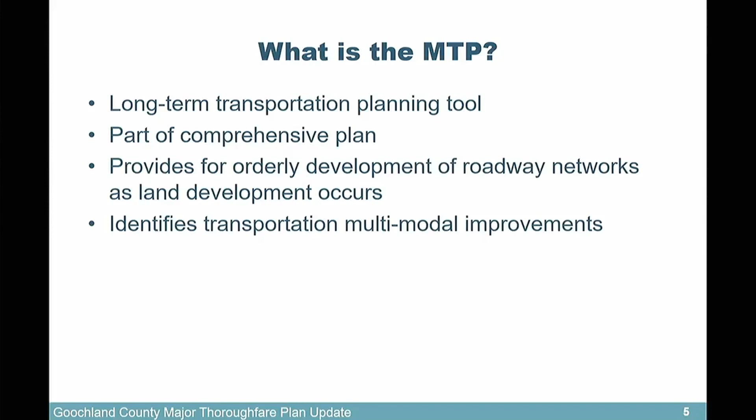So what is the MTP? It's a long-term transportation planning tool. It's very important to us because it's part of the comprehensive plan. It could be viewed as its own separate standalone plan, which it sort of is, but it really is part of the comprehensive plan. So as this plan is approved moving forward, that updates the comprehensive plan as a whole. It provides for orderly development of our roadway networks as land development occurs, which is very important to us, and identifies transportation multimodal improvements throughout the county.

Why is it important? It provides guidance to all of us, from county leaders to citizens and the development community, for transportation-related decisions. The second point is it provides guidance for preparing regional transportation plans. That's important because while we are Goochland, we are part of the Richmond region - we're part of that more global view of our road network, since 288 isn't just in Goochland, it's in other counties, and Broad Street isn't just in Goochland either. So we want to make sure we take that into consideration.

It also helps us be more competitive for transportation funding. We had 4 smart scale applications that we made just a few weeks ago that Mr. Coleman was part of and did for us. There was one project that wasn't part of the overall regional plan yet, so we had to take extra steps, which could be viewed as reactive, but it wasn't - we had a project that just became realized. Having all these projects set for us eliminates that critical step of having to have the region approve and sign off on those plans before we go for funding. So it's another important aspect of this.

Provides direction for allocating county funds for transportation improvements, which is always very important. And it is a living document that outlines all of our future needs.

So why update it? The previous plan is from 2005. We had some snickering at the first community meeting with Broad Street Road being widened from a 2-lane to a 4-lane all the way to Fluvanna. Rock Castle Road had improvements, Shannon Hill had improvements, Hadensville Fife had improvements. There were a lot of roads listed, and I'll get into more detail. Our gut reaction was, does Broad Street need to be widened all the way to Fluvanna? Gut reaction is no, but our engineers proved to us with data-driven information that that's actually not the case anymore.

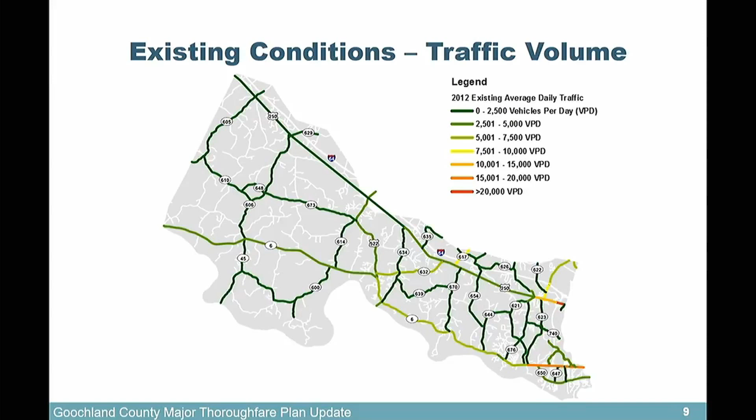Having said that, let's go into the existing traffic conditions—basically where our county sits today with regard to traffic volumes, roads, and level of service. Looking at traffic volumes today, it's not much of a shock, but we do know we have issues on certain roads. There's a lot of green, which is really good, showing our existing average daily traffic is actually pretty good. There are some yellow, orange, and red lines, and as a result we knew we had some areas to focus on.

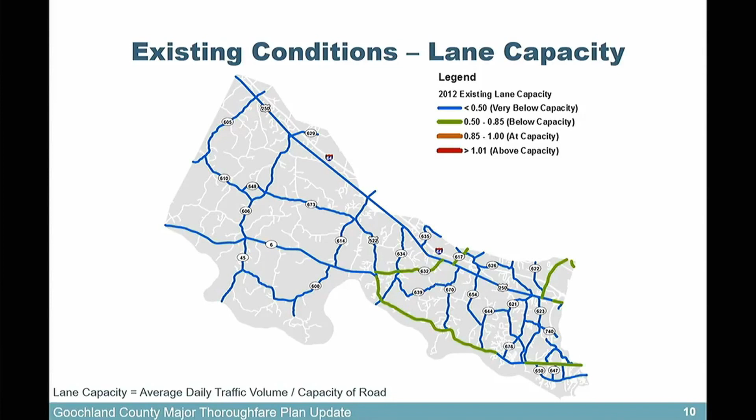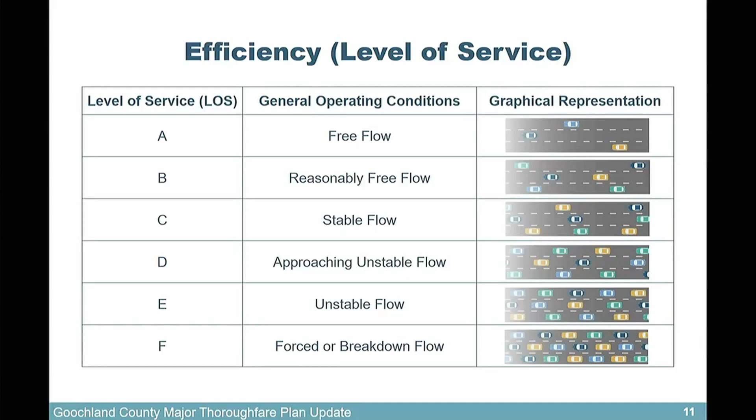The next slide is going to show the same map but with the level of service attached, but I wanted to discuss briefly what level of service actually means. We discussed this at the first two community meetings, but it's worth bringing up since it's an important aspect of transportation planning. It's really a grade allocation just like you'd have in school—A, B, C, D, E, F—and the images on the right show what that means. It's really a level of comfort: how comfortable are you on a road, can you change lanes easily, do you have to constantly wedge yourself between two cars, and with traffic signals, are you waiting 7 or 8 turns before you get to go through? So it's really your comfortability at these items.

We've also had several complaints on the I-64 Ashland Road interchange. Good news is we've already held a community meeting about what the public would prefer at that interchange based on VDOT's recommendations. VDOT had a few recommendations: a double roundabout, a full clover leaf, and a divergent diamond interchange, which is what you see at Zions Crossroads. Based on public feedback, we've gone with the divergent diamond interchange.

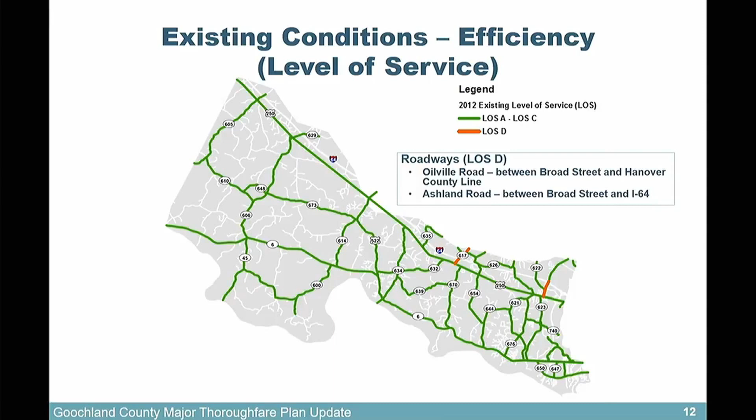So that's not in place yet. That was a smart scale application, so it's going to be a few years before that project's realized. But that's really why you're seeing that D there today.

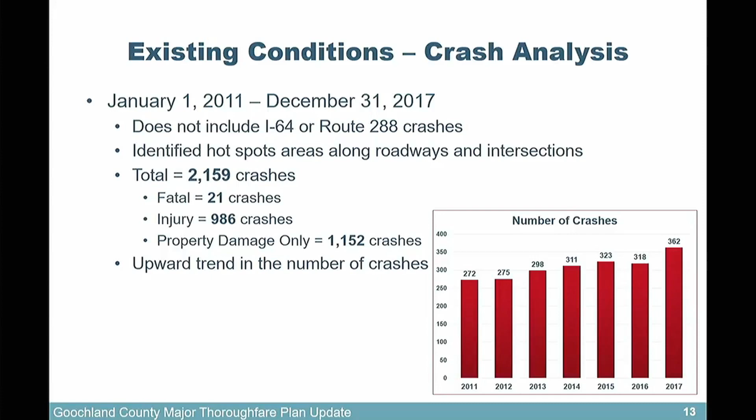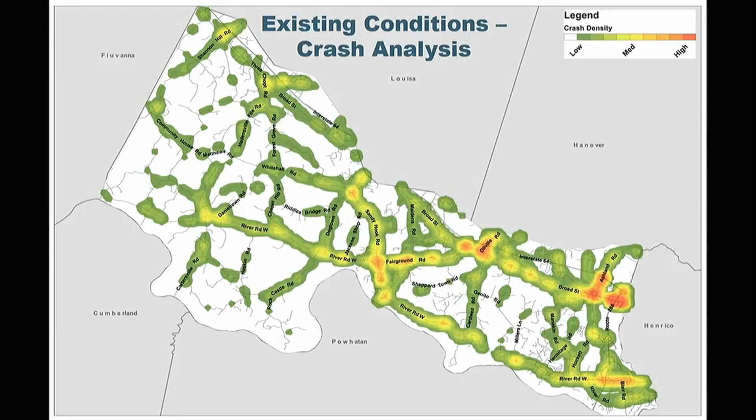We asked Kimley Horn to put together a heat map for us showing those crashes. I won't go through this in too much detail, but you can see some of the strategic areas already mentioned: Oilville, Ashland Road on Broad Street, and Route 288, where some traffic signals are already going to be installed. As a matter of fact, that interchange is going to have the traffic signals installed this fall, I believe. And down on West Creek Parkway and Patterson Avenue, those materials, from what we've heard, are already ordered. Is that right, Mr. Coleman? The materials are already ordered for that interchange. So we're excited about that—that can help us significantly.

So the next step we wanted to do, more of an exercise than anything, is what would our roads look like in the future if we didn't make any improvements? What does that mean for our roads? What does that do to the level of service? What does that do to the volume to capacity?

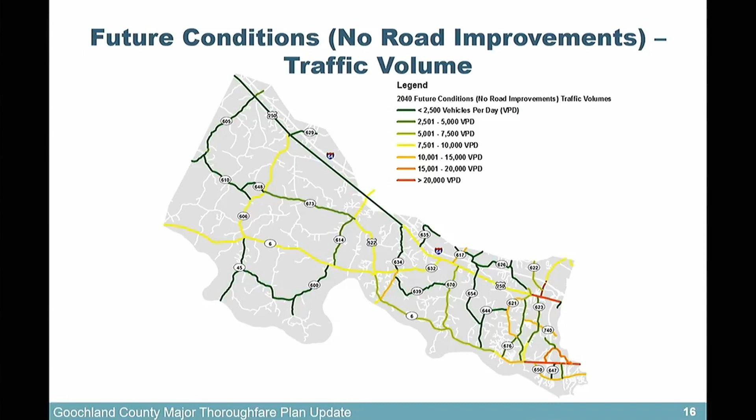Without any improvements, that original traffic volume map you saw a few minutes ago that had a lot of green lines, a lot of them have turned yellow, red, and orange. So we already knew there were some improvements needed in certain areas, but this exercise identified more areas throughout the county that would need attention if we didn't do anything.

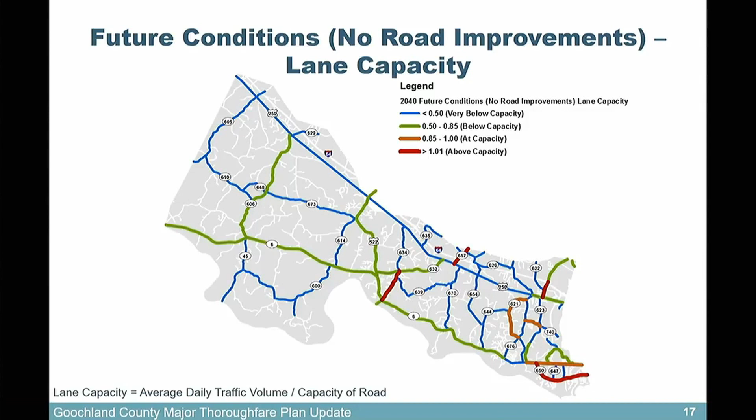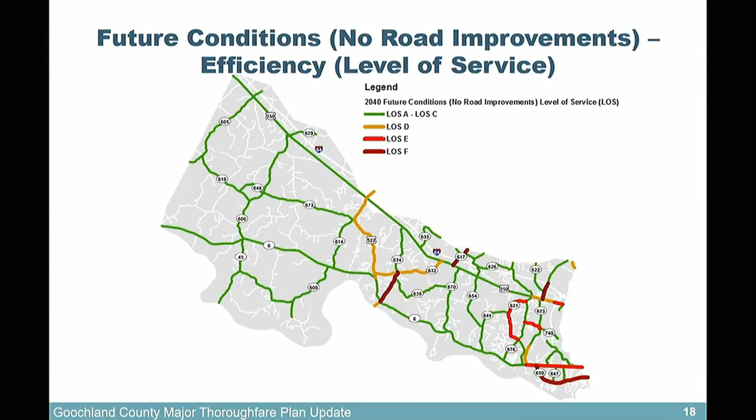So the future traffic conditions with the recommended improvements. The first few exercises with the existing conditions, and then the existing conditions with the future road traffic, were really important to get us to this very important stage—the actual recommendation section. The recommendations were based on many things, but we wanted to highlight what really guided us. One key item is our guiding principles, which will be listed on the next slide, and we also used our transportation plans.

That was in the data gathering phase of this. More importantly, the Plan 2040, which is the responsibility of the Richmond Regional Transportation Planning Organization, the RRTPO, covers the whole Richmond region. Their plan goes to 2040. In case you're wondering why our plan goes to 2040, that is the reason why.

We use existing safety and operational data. That was important for this. We also use the comprehensive plan and the analysis of future road conditions with no improvements, as mentioned. And last but not least is the public comments.

We had a lot of public comments at the first community meeting and the second community meeting. After the first community meeting, we called in some of those constituents and residents that had major concerns. We sat down with them to gather a little more detail on really what their concerns were and what they didn't like about the plan. There were probably 4 or 5 different meetings with residents, developers, and some of the developers' engineers.

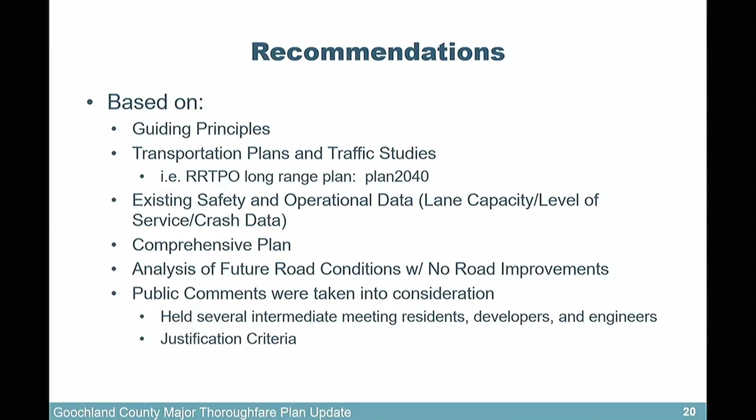We also added in the justification criteria, which was a request at one of the community meetings. So we'll show you what that is as well.

Our guiding principles, first and foremost, is always safety. It's not just with transportation, it's with construction, it's with everything we do. We want to make sure our residents are safe, so this improves travel safety for all types. We wanted to look at our designated growth areas, trying to preserve the rural character of our county. We also wanted to look at the connectivity of our roads, and it's not just roads, it's sidewalks and things like that—it's not just a road itself.

Level of service was an important factor here, and we wanted to make sure that was looked at, because we said we wanted to achieve LOS C or better. Economic development was a big driver of this. We wanted to make sure we took into consideration all the development we would see in our strategic growth areas—the courthouse, Oilville, east end of the county, and those areas. Multimodal was also an aspect of this, to provide a balanced transportation system.

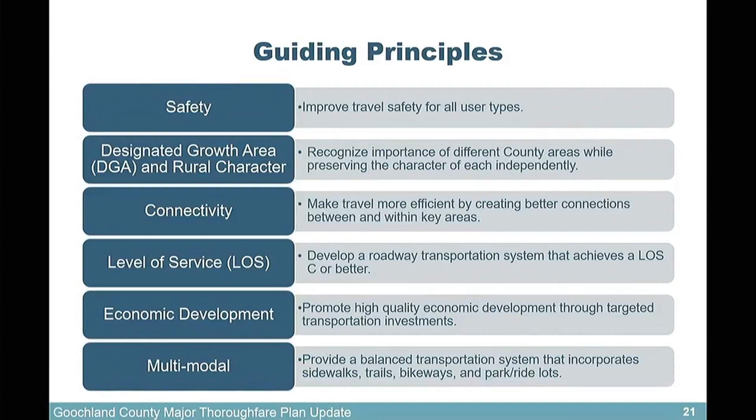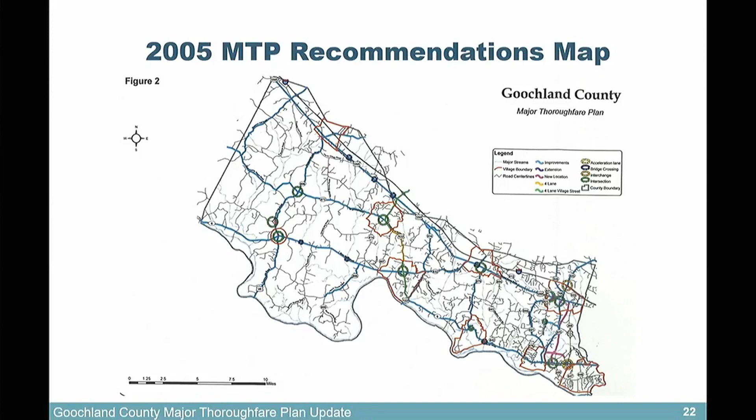This slide is actually very important, so I want to talk about it for a second. All these blue lines don't need to be done anymore, based on the data-driven information that Kimley-Horn has provided to us. In 2005, that plan showed over $100 million worth of road projects. Some of the roads didn't have costs associated with them, so I put that as a bullet point—I can only assume it's because the road project was identified so far in the future that they just didn't want to allocate a cost to it. But adding up all those projects, it's a little over $100 million.

Back in 2017, we had to take those numbers and update them for the capital impact model and the capital improvement plan. All those projects, in 2017 dollars, were a little over $200 million. So another way to look at this is that's $200 million or more that we would not be seeking funding for—that's taxpayer dollar savings just on this one slide alone. We would not be seeking local, state, or federal funds for these projects at all. And what that also does is allow us to focus a little more on the projects that are identified—take that $200 million and focus it more on the projects we know need to be done.

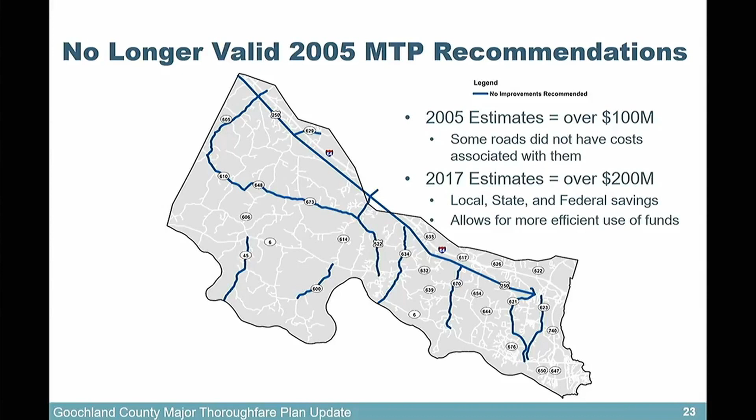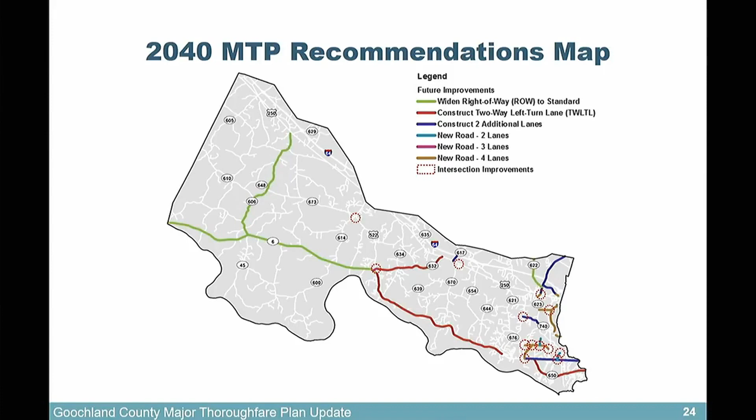Before we get into the actual recommendations, we want to show you how we're splitting it up. We split it between west, central, and east—it's easier to discuss what's in the western side of the county, the central service area, and the eastern service area.

Connectivity—we've already touched on a few points there, but again, it's part of our criteria. Multimodal, and last but not least, safety. We always want to make sure that's taken into consideration. So those are the criteria we used, and again, that comes directly from citizen feedback.

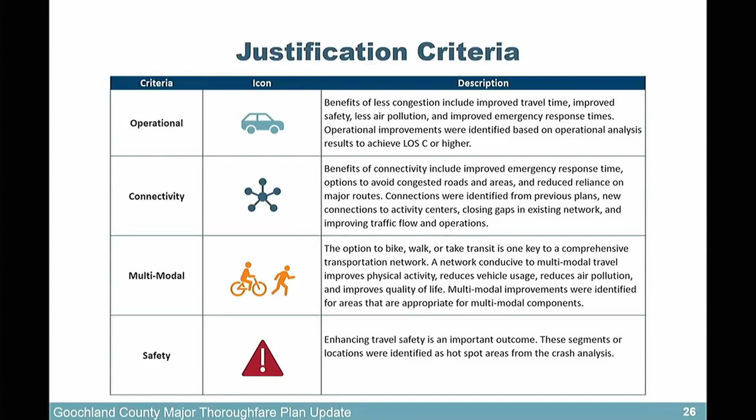And this is River Road West—I apologize, I didn't even say what it was. River Road West, from the Fluvanna County line to Sandy Hook Road. In the second community meeting, we also showed cross-sections of what that road would look like. That was one of the tasks Kimley-Horn had, so they provided us with cross-sections for all these recommendations.

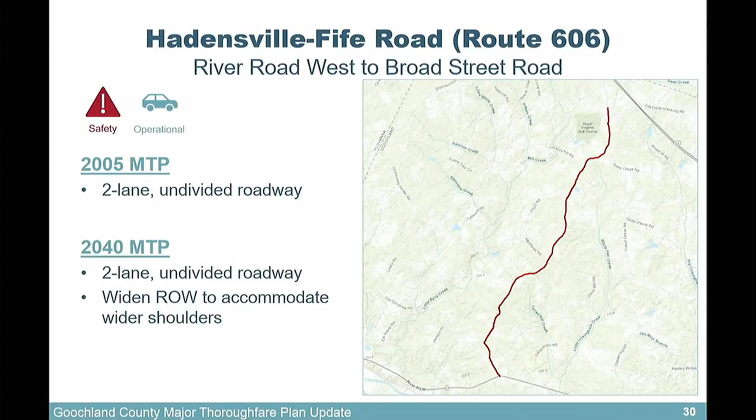Hadensville-Fife Road, same thing—widen the right-of-way to accommodate some wider shoulders. This one, as you see, is more safety and operational as opposed to connectivity. There's a cross-section, same type. So that's it for the western side of the county.

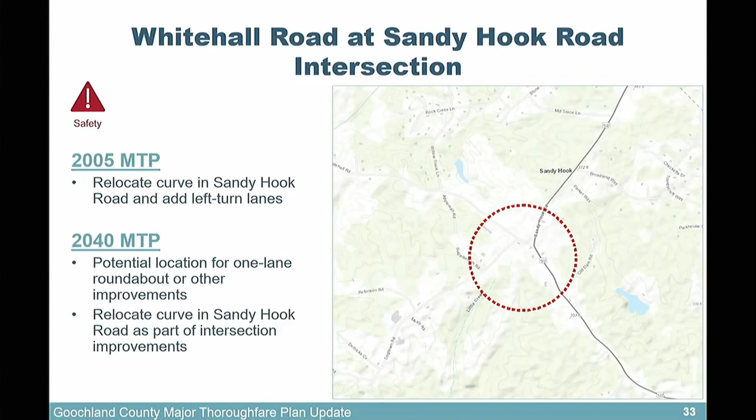Moving to the central service area, we have Whitehall Road at Sandy Hook Road intersection. Again, this isn't necessarily the road itself, it's just the intersection. The 2005 plan showed relocating the curve that's there at Sandy Hook—I've been on that curve many times, and that's what it's asking to do, relocate it. The new plan says you could still do that, but it's also a potential location for a one-lane roundabout or another improvement. It didn't say you didn't have to do what the 2005 plan said, which is relocate.

The public may not know this, but the actual intersection is already in the engineering phase—it's fully funded and being designed by VDOT as we speak. And for the extension project, we just signed the revenue share agreement recently, about a week or two ago, and that's back with VDOT, so that project is going to be moving forward as well.

Our goal is to take both of those projects, even though it's listed here as one sort of. VDOT has the intersection, but we're more involved with the extension portion—we're involved in both, but it's really VDOT's full funding for that part. We're trying to do it seamlessly, is the point. We wanted to make sure we weren't too far behind them, that they wouldn't be perceived as two separate projects. We wanted them to be seamless, so it looks like one—when the roundabout's complete, the extension's complete. So we've been working diligently with VDOT on that.

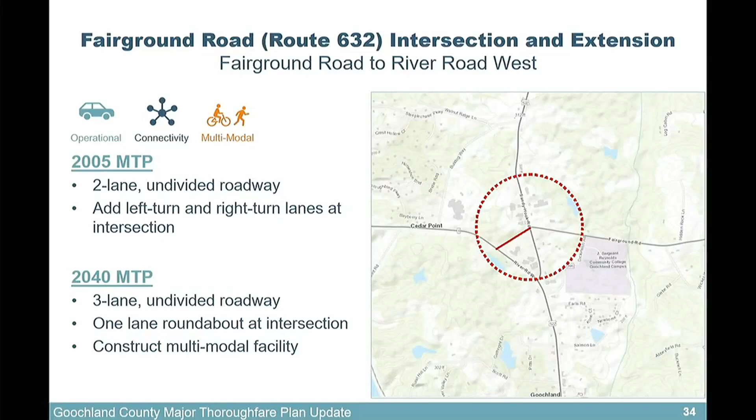We just received their 20% drawing - not the 100% drawing, just their 20%, so it's a really high level. There's a lot going on in this plan, but it does show the roundabout, the image that we just received from them. It looks to be, when you compare it to the original drawing we saw about a year ago, a higher level roundabout drawing to give us a good feel for what this would look like.

This roundabout appears to be a little bit smaller, a little less impact to the northwest quadrant, but it still does show impacts to the Exxon facility, and the extension itself to the west still shows a service road, so we're very happy about that. We wanted to have an access road behind the Exxon station, providing them another access back there. So we're actually very happy with this project right now, and we will always keep you posted on it as it moves forward.

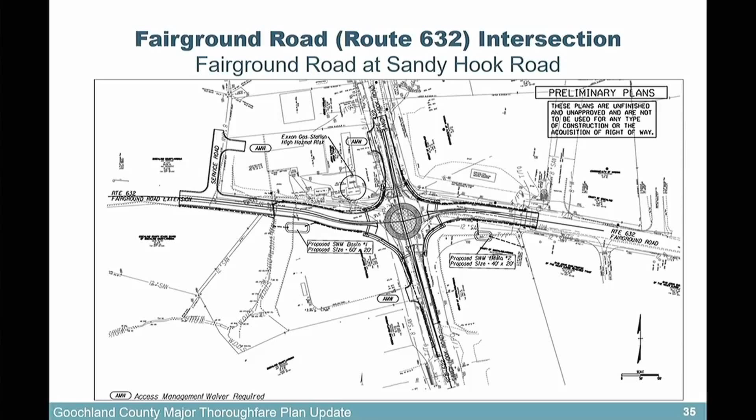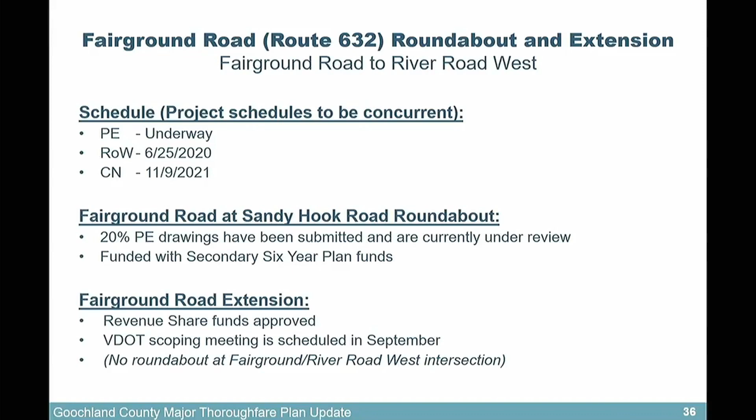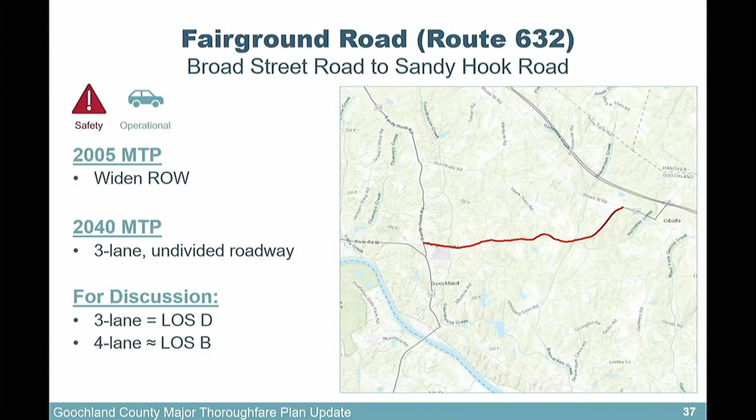And this would be a cross-section.

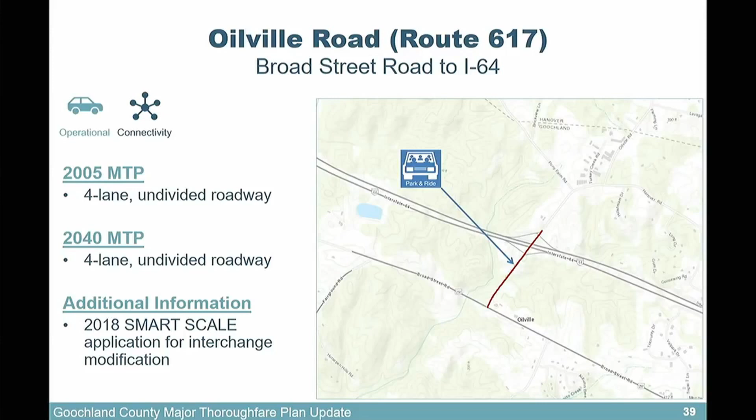Oilville Road - the 2005 plan showed it as a 4-lane undivided, and the 2040 plan still shows 4-lane undivided. You say, well, if there's no improvement being recommended here, and it's still red, what does that mean? Well, again, we're going after a smart scale application for the interchange, because it's not really the road itself, it's the interchange that's the issue. So that's already well underway, and we're very happy about that. It was a 2018 smart scale application. Hopefully 10, 11 months from now, we hear from VDOT that they are going to fund this project. We'll keep you posted as soon as we hear something from them.

This is just an intersection item here - Broad Street at Cardwell Road. The 2005 plan shows realignment of the intersection. The 2040 plan is showing either converting the intersection to a T-intersection configuration, and recommendation from Fairground to Cardwell. That recommendation actually came from the Fairground Road to Cardwell Road safety study that VDOT did for us last year. So that comes directly from VDOT.

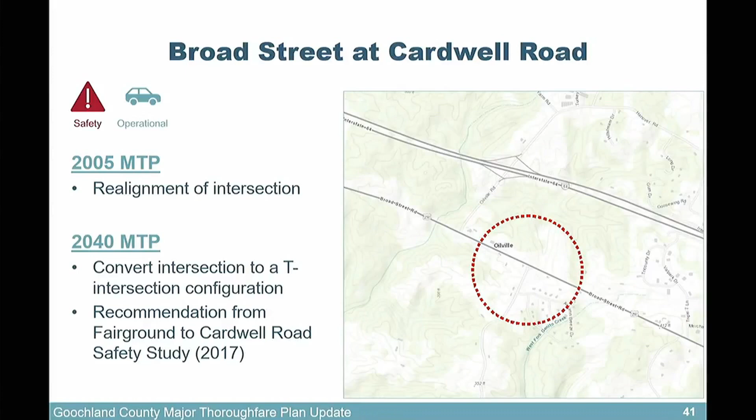So it does show the road going through the courthouse, as you can see. It's a little difficult to see, but it's on the left side of that image. In order to preserve the rural character of the courthouse, if it's 3 lanes, it would be a level of service D. Making it 4 lanes would be level of service B, which is what we're trying to get to. However, if we want to preserve the rural character of the county and keep it what it is today, we just wanted you to know the level of service would be at that level and not what the model is actually showing us.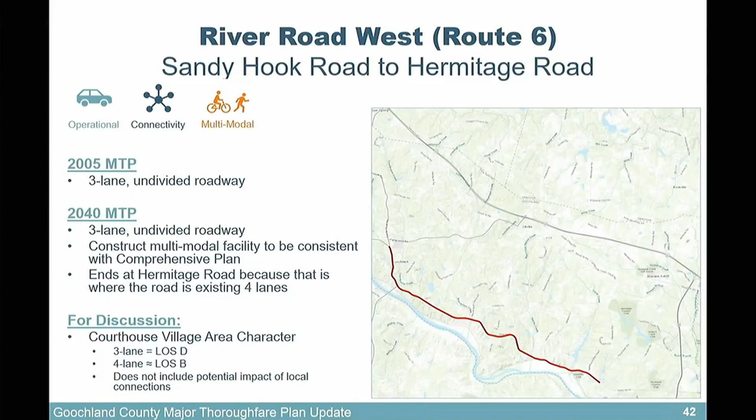That's it for the central service area. Moving on to the eastern service area. Tuckahoe Creek Parkway, at the intersection by Hermitage Road to Hockett Road, showed a 4-lane divided roadway, adding left and right turn lanes at the intersection. The updates are showing a 4-lane divided roadway as well, adding the same turn lanes, and then adding multimodal facilities. So this isn't just the road, this is the intersection as well.

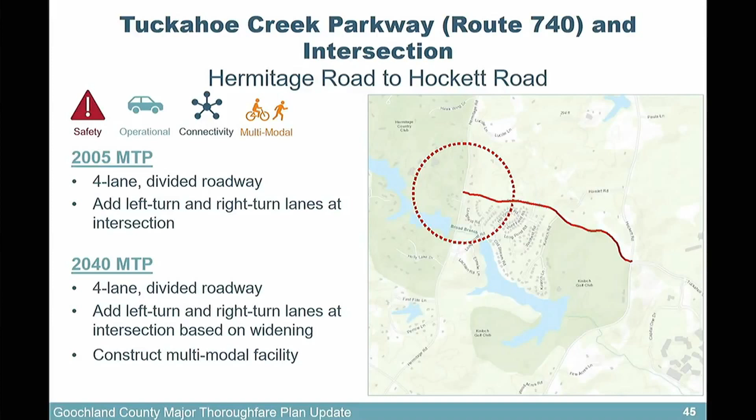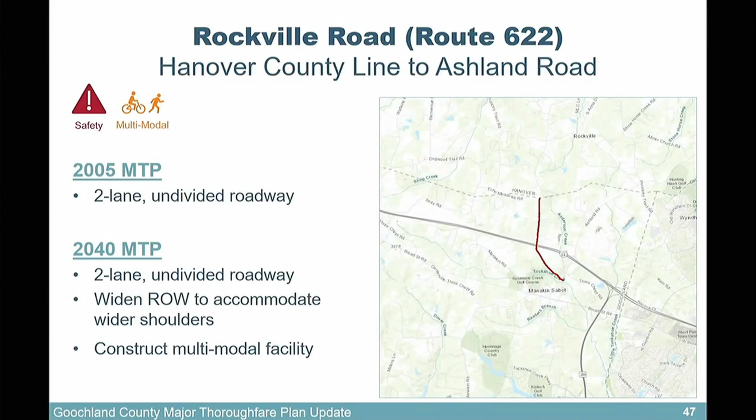Rockville Road, from the Hanover County line to Ashland Road. The 2005 plan showed a 2-lane undivided roadway. The 2040 plan is recommending a 2-lane undivided roadway as well. Again, this is just widening the right-of-way to accommodate wider shoulders and multimodal facilities. The big item here, if you notice in the icons, is the justification being the safety aspect. That was our number one concern with this road.

Ashland Road, from Broad Street to I-64. We're showing in the 2005 plan 4-lane divided, and the 2040 plan showing 4-lane divided, but constructing multimodal facilities. Again, safety was one of the number one factors on this road.

And again, as mentioned earlier, this was another smart scale application, that interchange there. VDOT just finished the Interchange Modification Report, the IMR - got to get my acronyms from VDOT correct - showing the divergent diamond interchange. So we know that this intersection will be better at some point in the future when they get that project rolling. But again, it was a 2018 smart scale application.

For discussion, the data-driven information from the software program is showing that to be a 6-lane to be a level of service B. But if that was not the desire and to keep it a 4-lane, that would be a level of service E. And it does not include potential impact on the improved interchange or local connections.

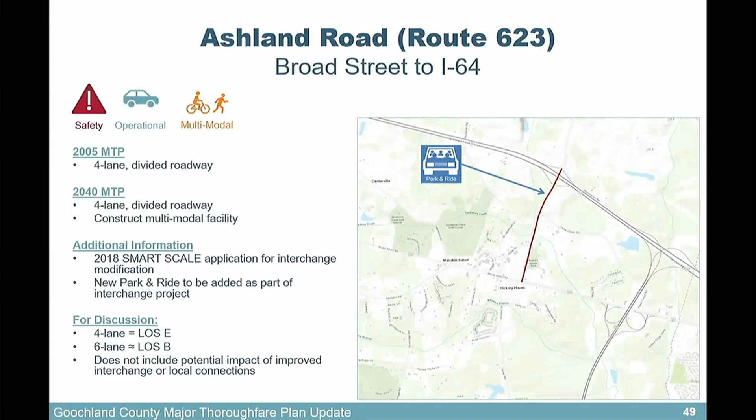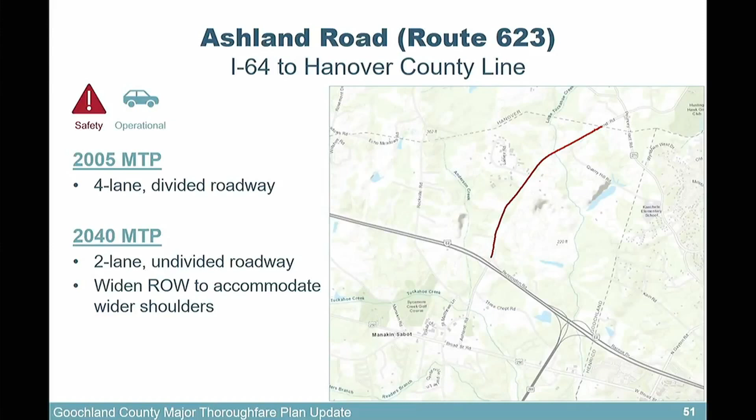So we split Ashland Road, as you'll notice, into Ashland Road south of 64 and Ashland Road north of 64. They're a little different because the south of 64 is really impacted by that interchange, while the north is, yes, but treated a little differently farther north. The 2005 plan showed it as a 4-lane divided roadway, whereas the 2040 plan is saying it can still be a 2-lane undivided roadway, but widening the right-of-way to accommodate wider shoulders. And this is what the cross-section would look like.

Hockett Road realignment project - this one's been around for a few years, it's not a new project. It was in the 2005 plan, and there were steps taken by the county a few years ago to try and move this project forward. But as we speak, the 2040 plan is showing to construct the south leg of the intersection, still telling us to do what the original plan was telling us to do with constructing multimodal facilities.

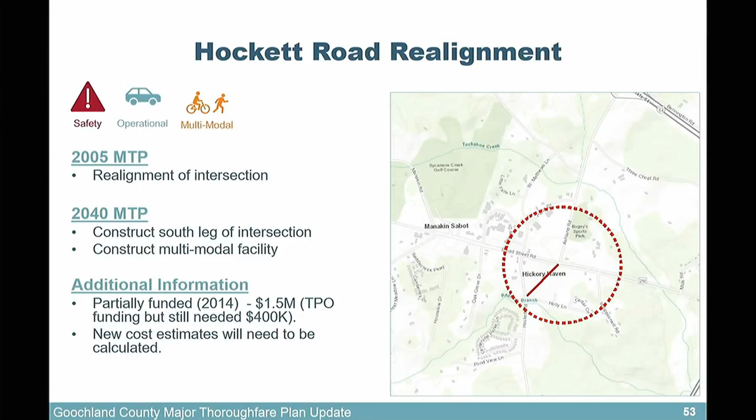Just some additional information: it is partially funded back in 2014, at $1.5 million. The TPO funding still needs $400,000 based on that 2014 number, which would bring it up to the $1.9 million needed. But again, that was 2014. It's now 2018, and we would suggest that number would be higher based on the increased construction costs we've been seeing across the board recently. So I don't want the impression that $1.9 million is all that's needed for this road at the moment. We would have to do a new cost estimate for it.

This is what the cross-section would look like.

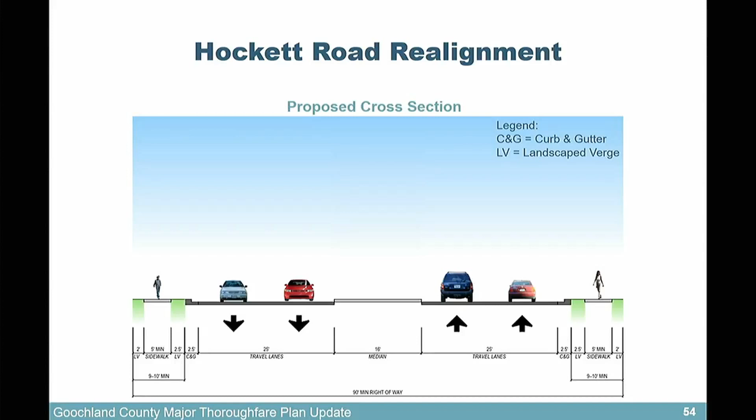Three Chopt Road - reconnecting, or really connecting Three Chopt to itself. Three Chopt Road exists on the east side of 288, and it exists on the west side of 288, but they're not connecting - it just cul-de-sacs itself. So we did a study, probably about a year and a half ago, with one of our on-call engineers to show us the feasibility of connecting those two cul-de-sacs. The gut reaction is going under 288, but is that feasible?

Is that logical? Is that something that can be done? So we hired the right engineers to look at that, and they did show us that it is feasible to go under 288. As a matter of fact, they were in charge of a project that just did the same thing in Charlottesville.

So it's not pie in the sky, it's something that's already been done and is feasible. That was also a smart scale application. Not this entire road, just a small segment going under 288, that's what we applied for funding for. We hope to come back to you in 10 months or so and say VDOT gave us approval to move forward with that project.

It was also identified in the arterial management plan, the AMP study that was done by Kimley Horn a few years ago as well.

For the road itself, the model showed us 6 lanes would be needed to keep that level of service. If it was 4 lanes, it would be a level of service D. I think the distinction here is it barely popped into the D category, and Kimley Horn could correct me if I'm wrong, but even though it is listed as a D on the 4 lane, it barely hopped into that category. This does not include potential impacts or improvements of an improved interchange or local connections, so this was just modeled for this information.

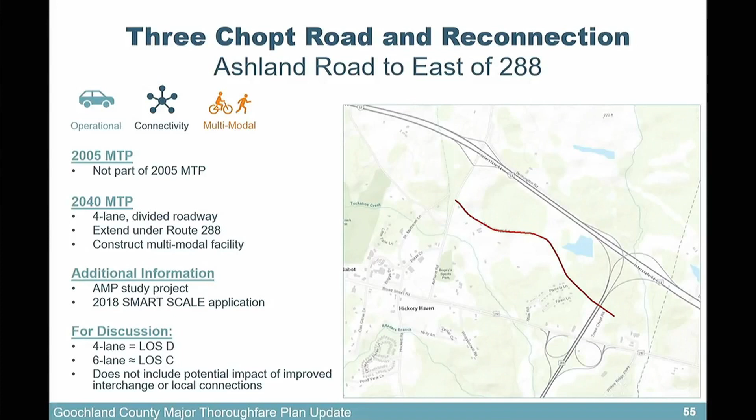Going back to the Three Chopt Road itself, going to Ashland Road, it actually wasn't part of the 2005 plan, but the AMP plan identified it. So the 2040 plan recommends a 4-lane divided road, extending it under 288 and constructing multimodal facilities with it. This is what that cross-section would look like for the 4 lanes divided.

Wilkes Ridge Parkway Extension, again not part of the 2005 plan. The 2040 plan shows it as a 4-lane divided roadway, constructing multimodal facilities on it. To date, the existing road has been privately funded, a developer-driven project. Wilkes Ridge Parkway is already there, and it ends right after the apartment complex near Sheltering Arms today, with plans moving forward to bring it closer to the creek.

And this is what a cross-section would look like.

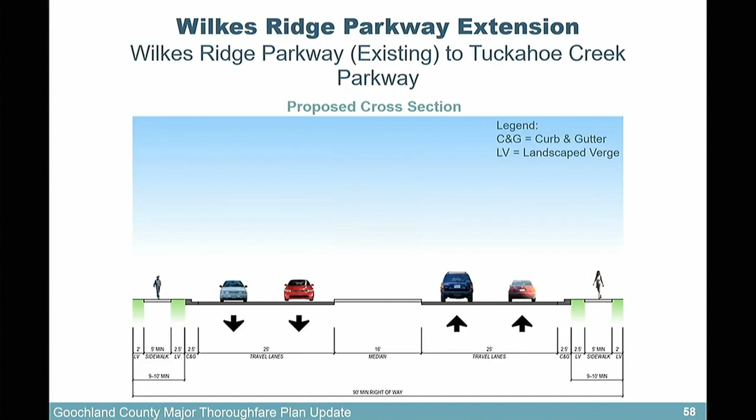So Hockett Road to the future, there's no road name here, it's just a connection from Hockett Road to that future Wilkes Ridge Parkway Road you just saw, and a new Route 288 interchange. This was not part of the 2005 plan, but the new plan shows a 4-lane divided roadway, and we would offer to conduct a study on the new interchange for 288. This would be different from the IMR. An interchange modification report modifies something that already exists. This would be an interchange justification report with VDOT, their terminology is IJR, so this would be us trying to justify that an interchange is needed.

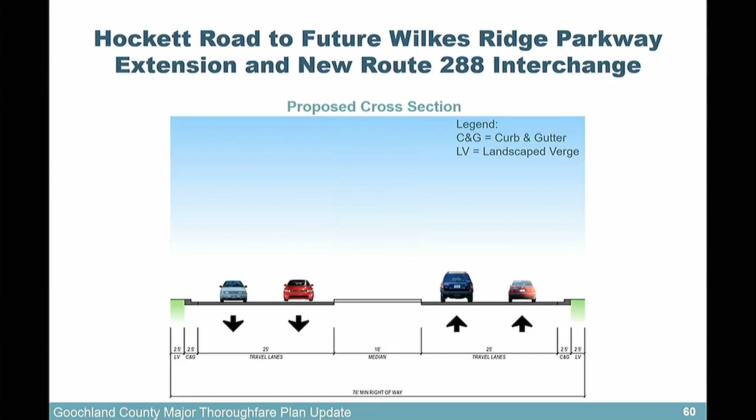And we would be pursuing TPO funding for the study, that's Transportation Planning Organization. This would be a cross-section. Again, we don't have any imagery for the interchange, this would just be the road.

Tuckahoe Creek Parkway Extension and Bridge to Henrico County, not part of the 2005 plan, but the 2040 plan shows that would be needed as a 4-lane divided roadway. There's pressures from Henrico to Route 288, we already know that, and this is a regional model, not just Goochland, so that's why you're seeing this connection to Henrico County. And this would be a cross-section.

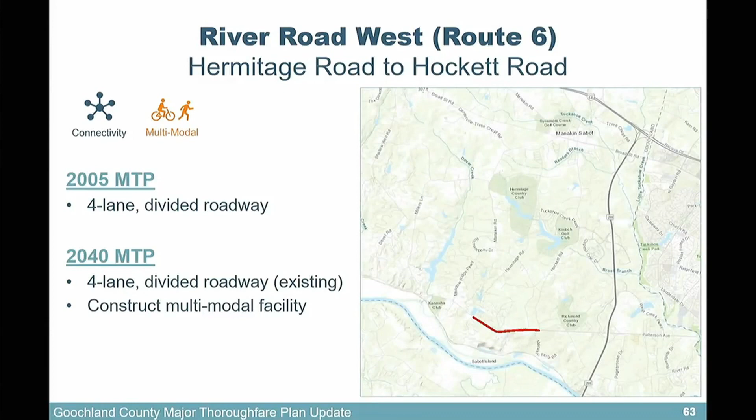River Road West from Hermitage Road to Hockett Road. The 2005 plan showed a 4-lane divided roadway. The 2040 plan also shows a 4-lane divided roadway, which actually already exists, so really the addition here is constructing multimodal facilities, as you can see with the 2 icons at the top for connectivity and the multimodal aspect. Cross-section.

Patterson Avenue from Hockett Road to the Henrico County line. The 2005 plan shows a 6-lane divided roadway, we're still showing a 6-lane divided roadway, but adding the multimodal facility to it.

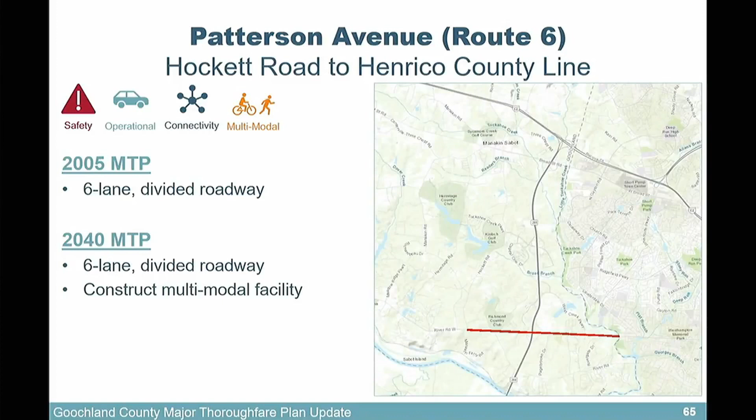And this would be a cross-section of what that would look like. River Road—I've been on this road many times. When I was with just the utilities department, we had a lot of infrastructure back in this area. And this is River Road, from River Road West, which is sort of where Patterson and River Road tie together, to the Henrico County line.

It wasn't part of the 2005 plan, but the 2040 plan is showing it, because of the growth that we're seeing, and because this road is also impacted by Henrico's growth. Henrico residents travel the road, so the recommendation is for a 3-lane undivided road with multimodal facilities added to it. For discussion purposes, this is where we're offering some discussion on this road.

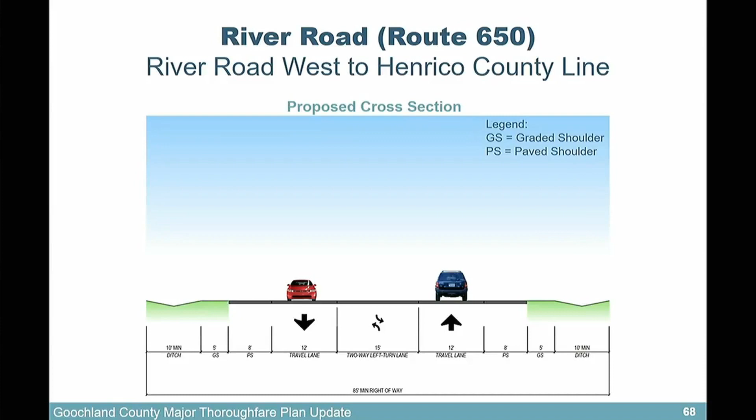West Creek Parkway from the Patterson Avenue connection, with 2 intersections here. Not part of the 2005 plan. The 2040 plan is showing a 2-lane undivided roadway. We'll identify intersection configurations as the roadway is constructed, and we do anticipate this to be privately funded.

In an area we're calling the Southern Prime Economic Development Area—this is probably the area we've had the most feedback on—from the Hockett Road corridor to the Route 288, Patterson Avenue area. The 2005 plan shows a north-south connector, 4-lane divided roadway, with an east-west connector, 4-lane divided roadway. The 2040 plan is showing, well, it's showing many things. As you can see, there are a few different roads here. But it is still showing that east-west connector is needed to alleviate the traffic burdens.

If you recall, at the first community meeting, we had a few residents concerned with the original 2005 plan, which is technically still our current plan today, showing Hockett Road widening to a 4-lane road. There were concerns with that for many reasons. One is some of the houses are pretty close to the road, so widening it would actually bring the road a lot closer to their front porch, and they were not happy with that.

So we took that information. This is where we incorporated a lot of the community feedback to keep Hockett Road a 2-lane. This is the road network that would need to be installed—the east-west connector would help with that.

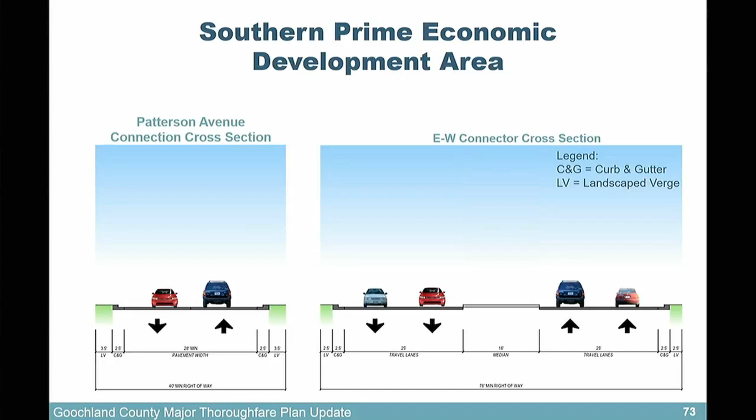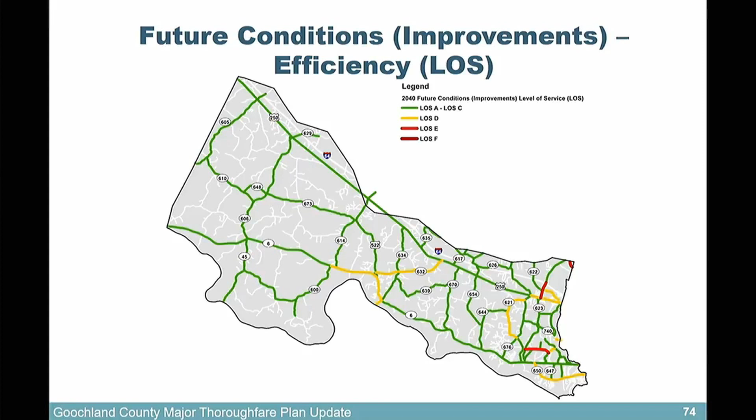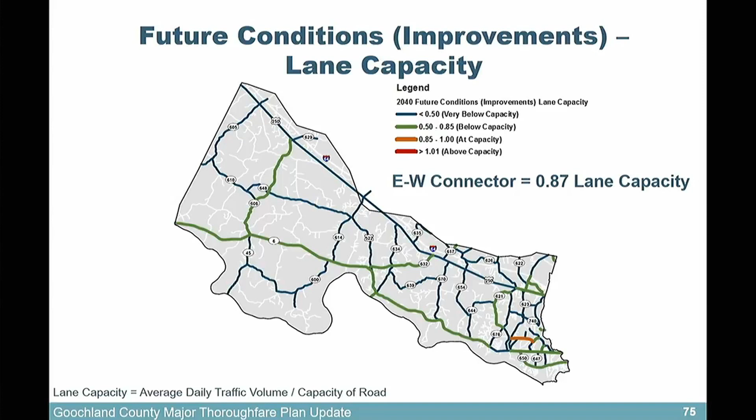So with these improvements, you'll see we're back down to the blue and the green lines. If you recall the previous slide that had the future conditions with no improvements, there was a lot more red, orange, a lot more yellow. This brings us back down to the green and the blue. I've already touched on the issues with that east-west connector road right there. But it is important to know that even though the east-west connector is listed as orange, meaning that it would be at capacity, that at capacity is actually a range - you see the range there in the legend, it shows 0.85 to 1. This is 0.87, so it barely pops into that category. And again, that's with future traffic loadings in the year 2040.

At the first community meeting, there were some questions as to what our priorities are with this plan. What are our priorities? What are we doing, or what do we plan to do with our roads? I've already touched on a lot of roads that we're already seeking funding for, but what are our projects that are underway or funded?

There's the traffic signals at Patterson Avenue and West Creek Parkway - fully funded. Route 288 and Broad Street, as mentioned, we should have those installed by this fall. Fairground Road and Sandy Hook, fully funded - it's the roundabout project. The extension project is also fully funded, that's a revenue share application with VDOT. Again, that's a 50-50: the county puts up 50% of the funds, and VDOT supplements with the other 50%.

Patterson Avenue and River Road West, northbound turn lane - engineering's fully funded for that. Wilkes Ridge Parkway extension, that would be the new road segment with private funds. Four Rings Drive, it is also a new road segment, privately funded. And then the Hockett Road realignment, it's at the bottom, it's partially funded. But the bold text shows what projects are already underway.

Our midterm priorities: the I-64 Ashland Road interchange - these are all the smart scale applications that I've already mentioned. But we had citizens request what our priorities are, so we wanted to make sure that was shown to you in these charts. Three Chopt Road connection, Route 288, which would be the smart scale application from VDOT. Didn't really touch on that - I probably should have on the previous slides because that's important.

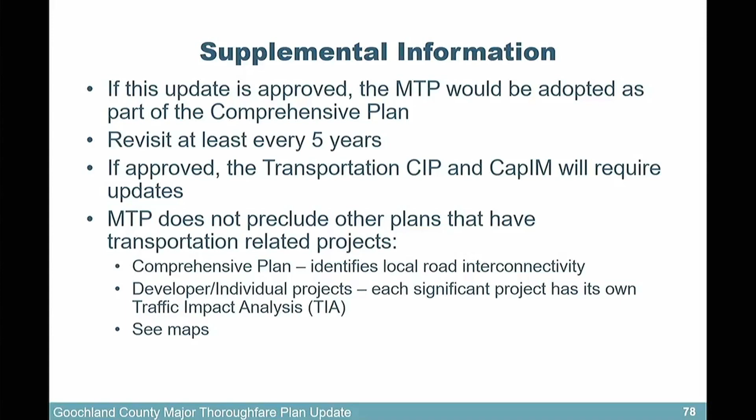Developer and individual projects: each significant project has its own TIA. Any project that would come forward would have to do their own traffic impact analysis, which would also help guide this. It doesn't show in this major thoroughfare plan what those would be—it would be developer driven.

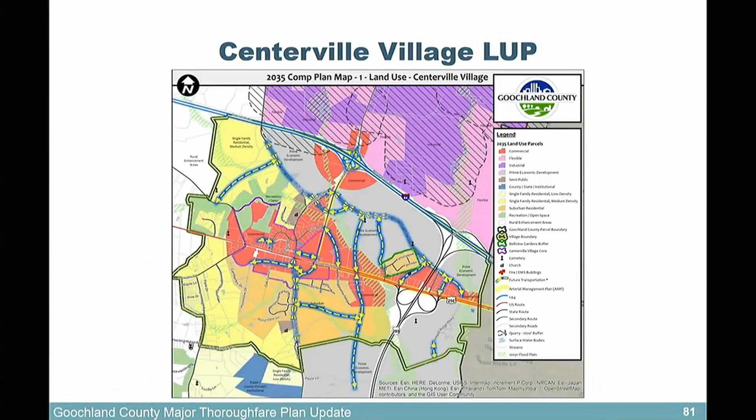The last image we had in here for the comprehensive plan is the Centerville Village. I wanted this in here because it shows a lot more of that interconnectivity between some of these roads in the Plaza Drive, St. Matthews Road area. There's a spine road between Hockett and 288 that goes south from Broad Street. These are roads that we need identified somewhere, so when we have conversations with developers, they understand where we're coming from when we discuss where roads could potentially go or where we would potentially need them.

So the next steps. Today we've just presented the recommendations, and a lot of information was presented here. We would like any questions, comments, feedback you would have before we finalize the draft report. You have a draft report sitting in front of you.

The next step would be to prepare the finalized draft report. VDOT is part of this process as well, so we'd have to make a submission to VDOT and have them look at this plan. Then, I think it's next week, September 4th, at the 3 p.m. session.

It'd be at the 3 p.m. session, a referral to the Planning Commission. The Planning Commission would then hear it October 4th. Again, it's tentative, depending on how much comments, feedback, and legwork we may have to do after today. Then ultimately the Board of Supervisors meeting on November 7th for recommendation for approval.

So that's our plan and the recommendations we have moving forward. Kimley-Horn is here again to address any of the more technical data, some of the behind-the-scenes information. So if you have any questions, we're happy to do our best to answer.

Mr. Kilduff, thank you for the nice summary. I just wanted to clarify, I think twice in your presentation, you said the red lights at Broad Street and 288 were going to be installed this fall. That's actually fall of 2021, I believe. Yes, thank you, that's what I meant. I apologize for that.

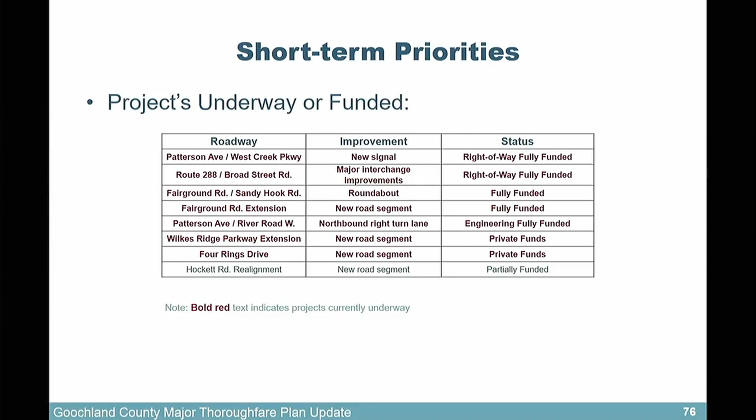I was making some notes, and I noticed there were 4 slides that had discussion items. I was wondering, those were clearly — I mean, I know everything's open to discussion, but I thought those slides were almost asking us to address those items. Yeah, different, because in most cases the level of service had not been brought up to the B or C level, and that's where they were looking for additional comment. But if we go through the projects from west to east, those slides will come up.

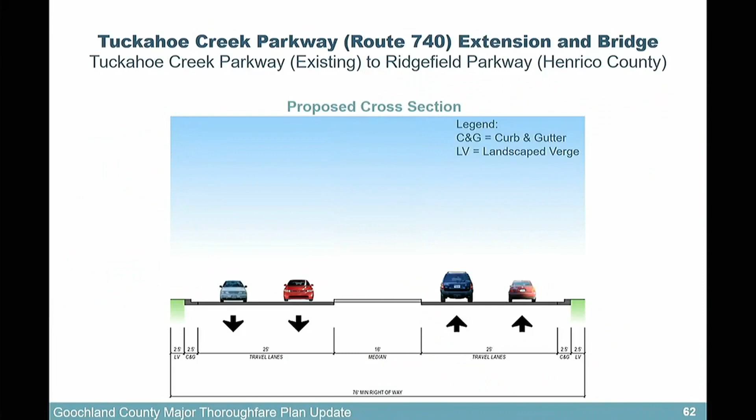Give me 30 seconds to toggle backwards here. Can I get control of this and just escape so I can scroll up? It'd be a lot faster if I could just scroll. The keyboard is not working, that's why.

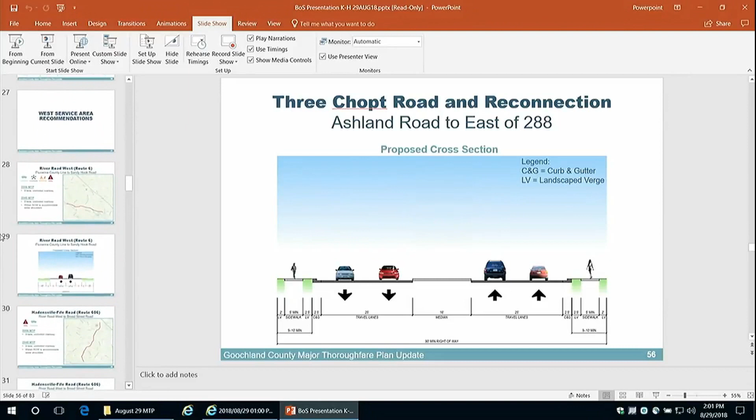Okay, we've got a lot of lawn to mow here, a lot of wood to chop, so if there's comments, great, if there's no comments, we can move forward. But let me just ask for comments as we go slide by slide.

Any thoughts or reaction to River Road West, from what looks like Fluvanna Line to Sandy Hook? Yes, I do, Mr. Chairman. Sorry, is that on? No. There we go. Okay, so I have one question that probably will apply across a lot of the slides, and that is widening the right-of-way.

So these roads — we're not talking about widening the road, just the right-of-way, the multimodal thing you're talking about, right?

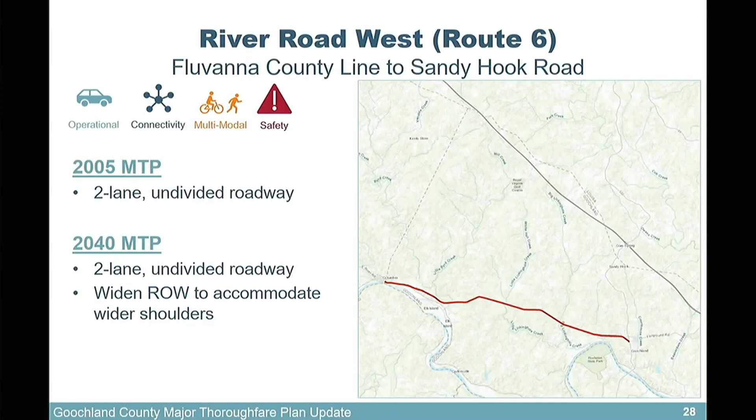So this is Route 6, also Haydensville Fife Road, same thing. I guess my question is a general question. Do we already have the right-of-way? Are we talking about taking land? How are we doing this?

Well, depending on every road, it's certainly going to vary as far as the right-of-way. We're trying to minimize the impacts of the right-of-way, but the attempt with all of these roads is to get them more towards the VDOT standard design, as far as lane widths and shoulder widths. Again, when you see the amount of traffic on some of these roads and the safety concerns we have, providing a more standard roadway feature will help with all of that.

So at some point that's a decision if there is a right-of-way taking. Are there areas where maybe it's not as impactful to have that right-of-way to improve the geometry and safety? But assuming that the right-of-way does vary throughout, and there are challenges certainly to get those, what we really try to do with every typical section we've designed up here is make sure we're matching the VDOT standard for the roadway, which will help when we're looking for funding, to make sure you're going to get the appropriate funding, but also those maintenance funds to support the road at a later point.

Can I add to your question? It is a goal on any project for us to never want to do a public taking of someone's property. We always try to work with the property owners to make improvements. Some of these plans are also extremely important as development comes along, that you work with the developers to get the right-of-way dedicated at the time of a project.

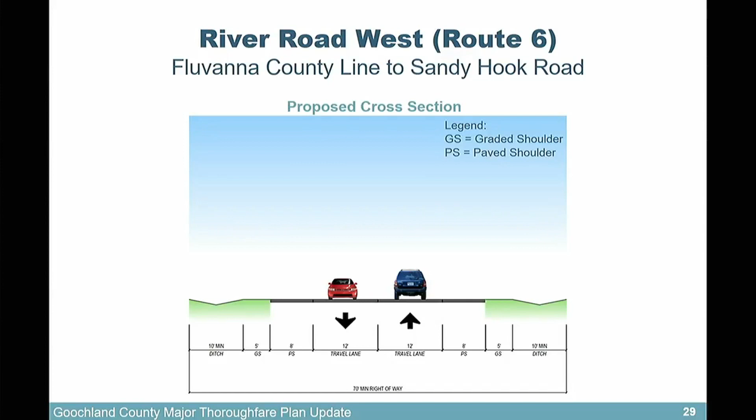It sounds like the answer is no. I think the answer is no, yeah. One other thing to note is our socioeconomic data for Goochland County has been developed based on the capital impact study, so that was our basis.

So you didn't include surrounding counties, what they're doing, so the impact to us. I don't know whether a big heavy dump truck is going to want to take the Cartersville Bridge, or come further west and take the Maidens Bridge, or stay on 60 and go to 288. But I think those 300 trucks are going to go northeast somewhere.

My question is about this first stretch we were looking at, the Fluvanna line to Sandy Hook. Do we have, by segment, the number of accidents in these areas? Because widening the road, traffic isn't horrible. I know there are places with no shoulder, so I'm wondering, are there accidents where people run off the road and there's no shoulder to rescue them?

Is it possible to get, for all of these defined segments, not just this area but everywhere, the number of accidents within that segment and the type of accidents, so we can have an idea of whether widening the shoulders really helps, or if it's just a backup when school buses are out? What are the issues?

It's a good question, and what we try to do is highlight the crash density, but it can be broken down any way you want. We could show fatalities, just property damage, the causation or type of crash, whether it was a right angle, a fixed object off the road to the right or left, any way we can do that.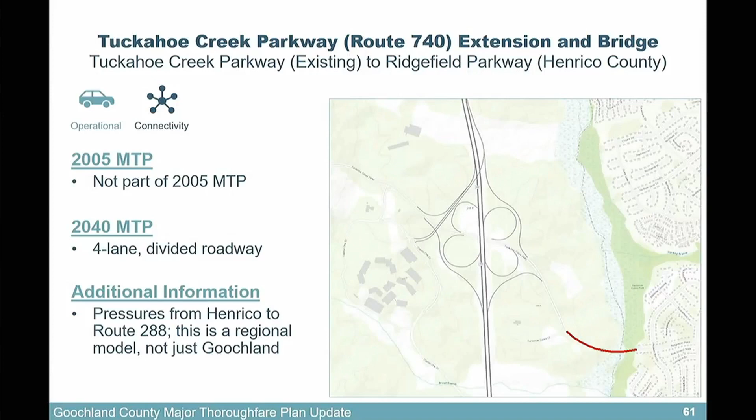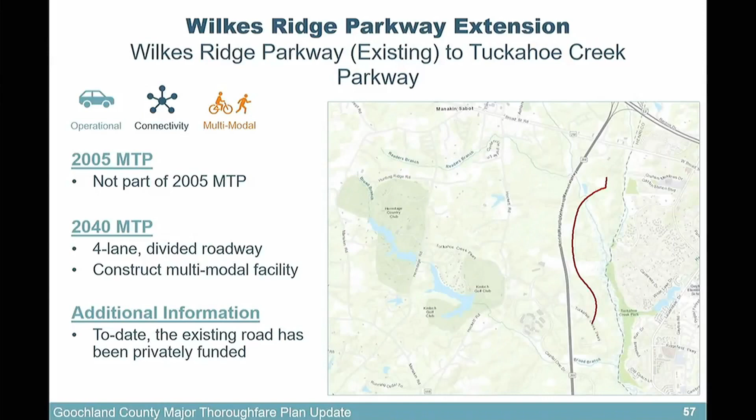I think it's obvious that this is here to fill out West Creek, but I think the 740 extension and bridge kind of go hand in hand with this to me. Okay, so the thought is that both that one and the bridge, both would stay on the plan? Okay, we got consensus there. Then there was one in between those two on slide 59.

This is going to be a study as to whether or not we need another additional interchange on 288. At this point, we're pursuing TPO funding. Maybe staff, is there an update on the TPO?

No, we submitted an application for funding, and this was part of the discussion where they said this would be a good application, and they encouraged us to have movement on the $1.5 million on the Hockett Road relocation. So we asked them about this, and they answered about that. Okay, so I take that as there's no TPO funding immediately available for this. Yeah, okay.

Ms. Minnick, your thoughts on this one? My understanding is an interchange is going to require an awful lot of land to do a cloverleaf there. There could be some on-off ramps, but, I mean, again, this is the connection into Hockett. It potentially opens another can of worms.

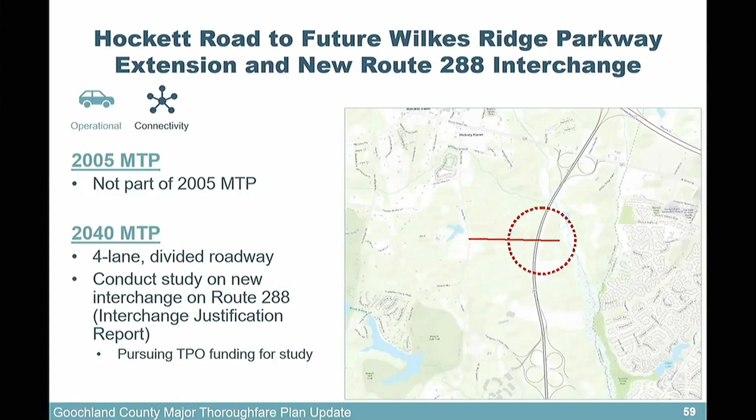Yes, and to clarify, it looks at all the links being complete. I want to be transparent that partial links don't get us to where we need to be. For a time you're not going to be able to build everything in its entirety, but with a plan forward knowing what the end game is, when we look at these links, it isn't the partial but the full, because that answers the global question, both within Goochland and how it interacts with surrounding communities.

So it is important to have some sort of east-west connection here, to take some of the pressure off some of the other intersections and roadways. Correct. Does that help, Mr. Minnick?

I think this is really about connectivity, because while it may create a can of worms at Hockett, it may also alleviate traffic that would normally follow Hockett all the way to Broad Street, instead going toward that, getting on 288, then getting on 64, and it might eliminate somebody having to go to the intersection of 64 and Ashland Road. Even Hockett and Broad could be alleviated. So I think it makes sense.

The exact location may be tricky because you're close to two other interchanges, and I don't know what VDOT is going to like as far as distance between those interchanges. I'm curious, do y'all have an opinion on that? Because my impression is these interchanges are too close together. There was a previous discussion with VDOT about this interchange, and they looked at different configurations for what would actually fit, and there are different configurations that will fit into this footprint.

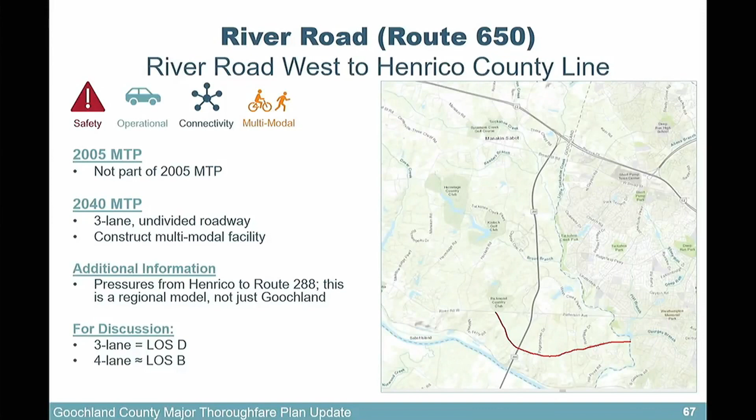So this is Tuckahoe Plantation here, and then there is some vacant land here that I believe at some point we heard from somebody that wanted to develop property up there, but I haven't seen anything lately. So I guess those things could impact it.

Do we have the water capacity? We do, east of 288. We still have some capacity east of 288. We would require them to do a water model themselves as part of their project if they were to bring that in. There is a booster pump station that was installed specifically to boost the pressures in that area, and we already know we have the water capacity in the system itself, but we would still be requiring a water model just to verify that.

And we do not have anything currently under review, so folks don't need to get anxious about it - there aren't any projects we're reviewing. And whatever was proposed there wasn't a high-density type place either, so I'm having a hard time seeing the need.

So 3-lane with multimodal - why not just leave it as is? It's not abundantly clear that there's a need to go from 2 to 3, other than your data telling me even that won't get us there.

Do we know what the level is today? It's green, it's A, level A. It's between A and C. A and C, it's green, yeah, A and C.

I would put this on the list to maybe not plan for at this point, unless we can get some more data that really shows why. Leave it 2-lane, but add multimodal to get bicycle traffic off. Okay, let's leave this at 2, and if you could take a harder look at that one, just let us know before we formally adopt it, just to make sure we're on solid ground. I'm having trouble seeing that one. Be interesting to know what pushed it to be 4 lanes. We remain to be convinced, okay?

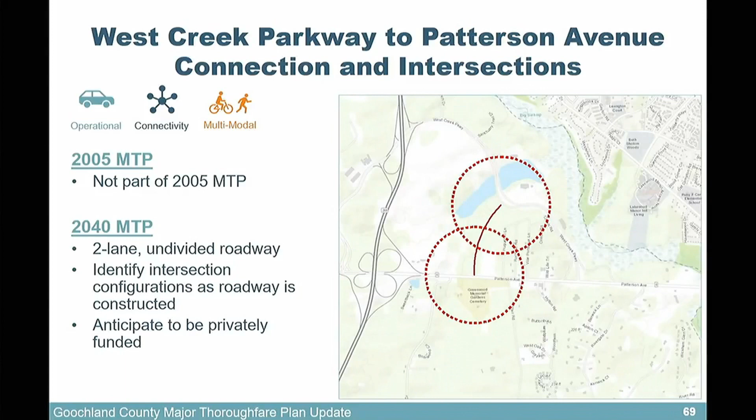On to the next one. West Creek Parkway and Patterson Avenue. This is in the general area where we've already approved some development at Patterson and 288. This is just for a 2-lane undivided, and take a look at the intersections to see what makes the most sense. Privately funded again, because we've approved development in there. Any thoughts or questions on this one? Pretty straightforward. Okay, on the next one.

This is the SPEDA. That's a mouthful, I don't want to say it every time. The SPEDA. I'm gonna start with east-west or north-south. We've got two slides on the same project. Maybe you can just walk us through, eat this elephant one bite at a time.

All right, so the first piece is the east-west connector, which goes from Hockett Road, connecting into West Creek at the 288 interchange. So that is proposed to be a 4-lane divided roadway. Now, when we modeled this previously, we modeled it with River Road as a 4-lane. We came back and looked at River Road as a 3-lane, now without an additional connection between the north-south into River Road. So because we have dropped the capacity of River Road, as well as eliminated the direct connection to River Road, that has caused additional vehicles to be attracted to this east-west connector. So that has driven up the level of service, as well as the volume.

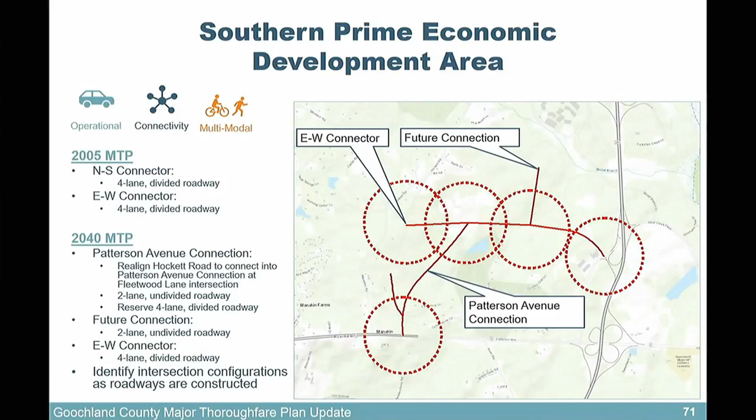And Hockett's only two lanes, so you go four down to two, I guess. Yeah, you would only build that road, the four-lane section, to the point of need - whatever development it needs to serve. Maybe just west of that Patterson Ave connection it can be four lanes. Again, that will really depend on what level of impact is out there.

Okay, can we go to the next slide for discussion? Because we need to have some discussion around this. The four-lane gets us to a level of service E. Before, when we had River Road as four-lane, Patterson as six, this east-west connector operated at level of service C. Now that you've removed the connection to River that we had shown previously, as well as the additional capacity of River, it has degraded the operations on this roadway, because traffic is more attracted to this segment.

So the east-west, if we fully implement the plan as currently contemplated, would still be a level E. Is that what this is, the model is telling us? Yes.

Yes, the area we're calling West Creek is up in here, right? And this almost shows it, here's Tuckahoe Creek Parkway up there. Slide 57, don't go back to it, but the Wilkes Ridge Parkway extension brings it just right to that point. Is Broad Branch, I probably should have pulled out my comprehensive plan maps, but this is kind of a barrier, so we're not going to see pressure, road pressure from up here add to this likely, are we?

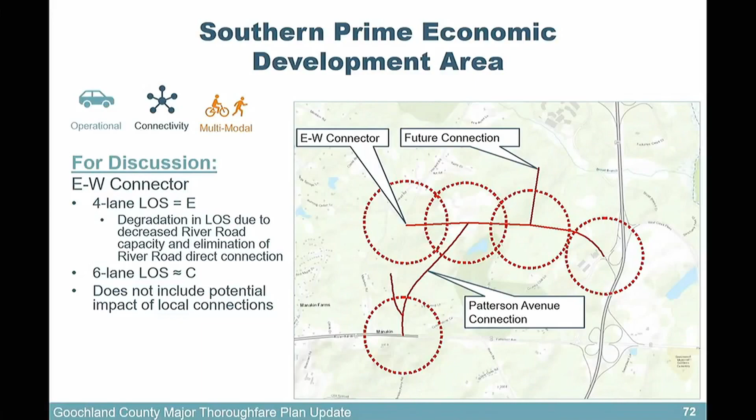This feels like a solution in search of a problem to me. Because an undertaking like this seems to me almost like a Kinloch-style development, where you have a full-featured conceptual plan of development that precedes all of this, that then shows where all of the potential growth and development is going to occur by phase, and the roadways to support those. So I feel like I'm just putting a line on a map because I can, with it not serving any real purpose, because I don't know what I'm trying to fix yet.

That's the feeling I have on this. I know I can't speculate whether connecting this thing into West Creek over there is the way to do it, or if it should drop further down south. I don't know if there might be some ramifications with RCC. I don't know exactly the full terrain, the land, how the land looks, it's possible, but I just am not sure.